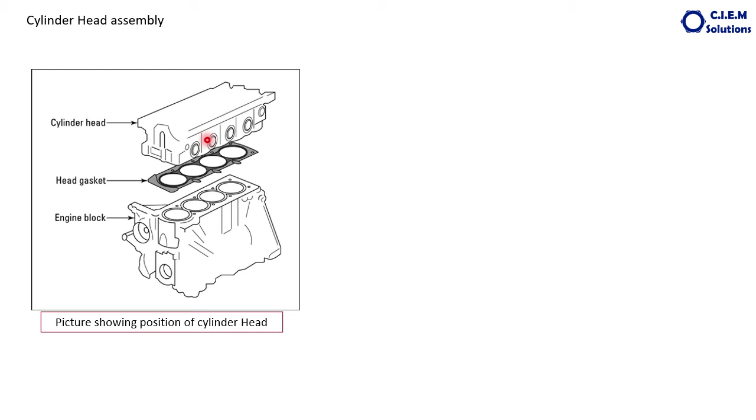A typical 4-cylinder engine cylinder head looks like this. You can see there are total 8 valves, 4 inlet valves and 4 exhaust valves, and the valves are secured. This center one is the valve, exposed here - the valve stem. This split piece is called valve locks or valve collets. This is the valve spring retainer. This is the valve spring which holds the valve always in closed position, and inside there is a valve guide, and the other side of the valve is called the valve head. We will be discussing in detail about each and every component.

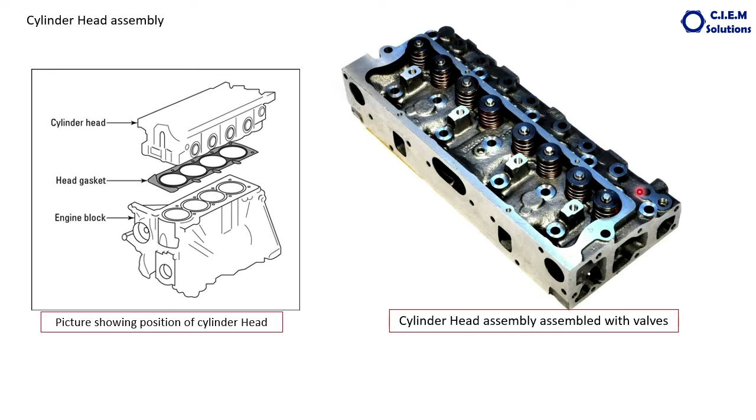These holes are provided for the push rods, which are part of the valve operating mechanism. This is the same head, you can see the other direction. These are the areas for the valve seats - in this groove valve seats are inserted, which are closed with the valve head.

This is another 4-cylinder engine cylinder head which has 4 valves per cylinder, 2 inlet valves and 2 exhaust valves. This is 1 exhaust valve and 1 inlet valve, that is 2 valves per cylinder, and this is 4 valves. All modern engines, majority of them, are coming with this design. Why 4 valves? To get more intake air inside the cylinder and to produce more power, and to evacuate the exhaust gases outside. So the main purpose is to produce more power in the confined cylinder area.

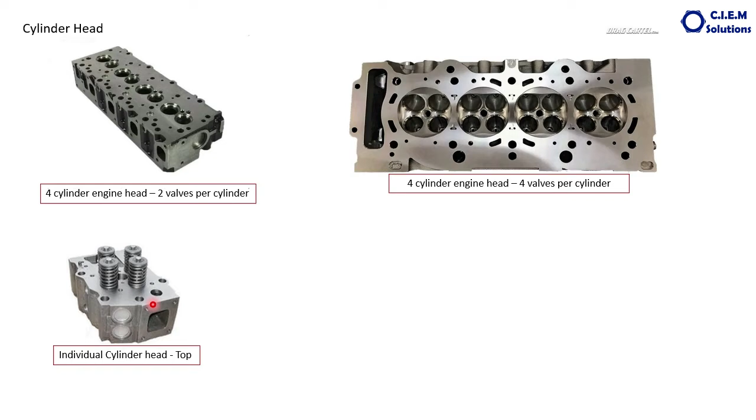This is another type of cylinder head, called an individual cylinder head. Large capacity engines have this type of cylinder heads. Why? Because in case of any problem in the cylinder head - maybe a crack, maybe damage - if the cylinder head is rejected, the entire cylinder head has to be thrown away, which is expensive for higher horsepower engines. So individual cylinder heads are made for that. Suppose one area in one cylinder has a problem, it is enough to replace only that particular cylinder head.

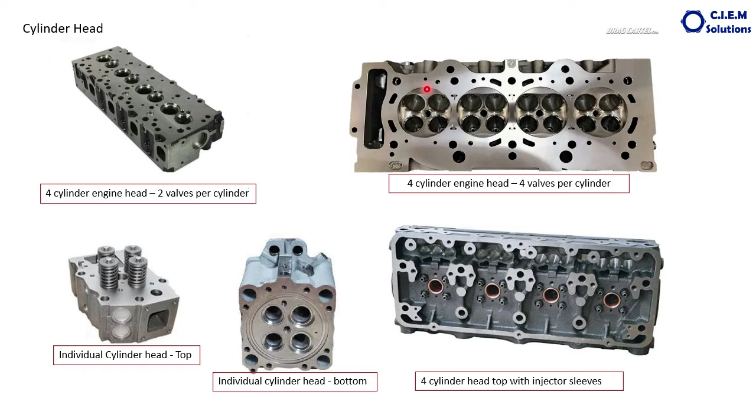The back side of this individual cylinder head looks like this. This is again the 4-cylinder head. You can see these copper portion areas - these are called injector sleeves. These are provided to fit the injectors securely inside and also to provide sealing for the fuel passages. How the sealing takes place we will discuss separately with the injectors. Some injector sleeves are also directly exposed to the coolant in order to dissipate heat at a faster rate.

And these hollow tubes which you can see here are called valve guides. These are useful to guide the valves' up and down movement. These are called valve guides, and they are also replaceable after a certain time.

Now let us see what is the job of the cylinder head. The cylinder head has to give the sealing for the combustion chamber. The top portion of the combustion chamber is sealed with this head - this is the place which seals the cylinder from the top portion. The bottom portion is sealed by the piston and piston rings. During the combustion process, all that heat and thermal and mechanical pressure also act on the cylinder head.

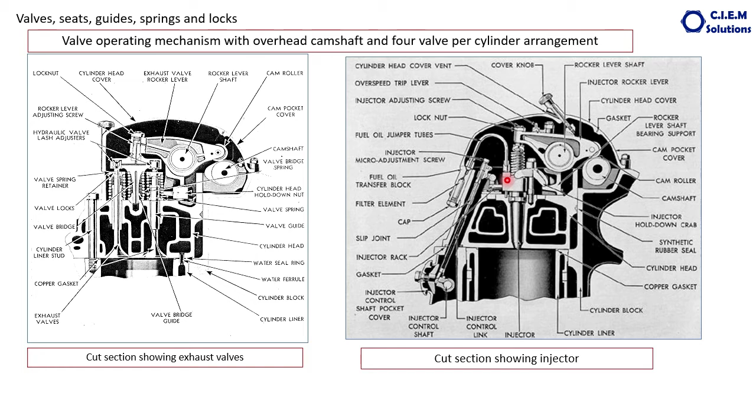And if you cut the cylinder head a little bit away, you can see the injector placement here. This is what we discussed about the injector sleeve in the previous slide. This is the injector, and this is again fuel piping, etc. Actually, this is how it looks like.

After the cylinder head, now let us discuss the valves. This is the complete valve assembly. This is the valve. This is called the spring collar, where the bottom portion of the spring sits, and it is on top of the head. This is the valve guide, which has a hollow tube - the stem of the valve will be inside this valve guide.

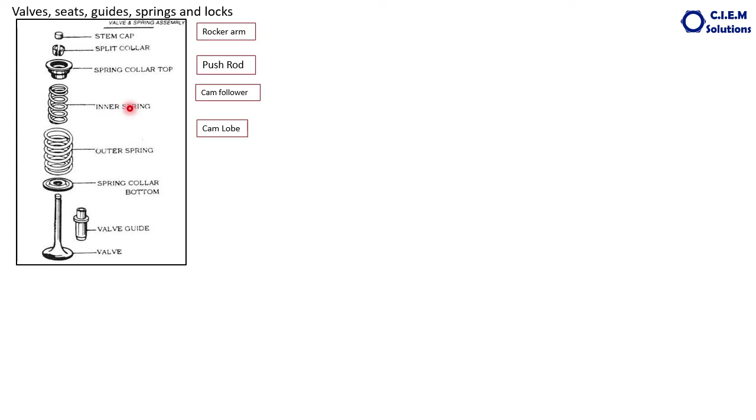This is the outer spring, this is the inner spring. Some engines are provided with 2 springs and some engines are provided with a single spring. This is called the spring retainer or spring collar. And this is called the spring split collar. This is again called the stem cap. Above this there will be the rocker arm, then below there will be the push rod, then there will be the cam follower, cam lobe, etc., what we have seen in the previous slide. These are all the various parts fitted inside the cylinder head.

This is what we have seen in the previous slide, the valve operating mechanism, or valve train. When the camshaft rotates like this, in this position, because of the lesser radius in the cam lobe, the valve is in closed position.

When the lobe comes here, this push rod is lifted. When the push rod is lifted, this rocker arm's end is lifted and this end is pushed down, pushing the valve down and creating a passage. If it is an inlet valve, fresh air enters from outside to inside. If it is an exhaust valve, burnt gases are scavenged from inside to outside. This is how the valve operates.

The spring is provided to hold the valve against the seat face, closing it always. Whenever the lobe reaches here, in relation to the piston movement inside the cylinder, this valve is opened and closed.

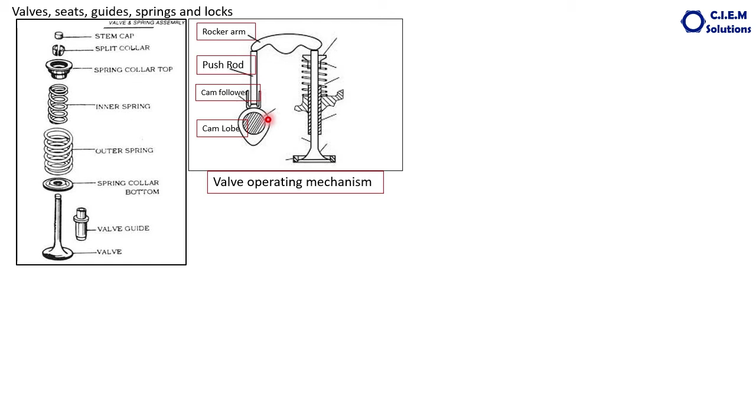For example, if it is an inlet valve, when the piston travels from TDC to BDC during the suction stroke, the lobe will be in this position and the push rod is lifted, the rocker arm is lifted here and pushed down, opening the valve. As soon as the suction stroke is over, the lobe rotates further, bringing the valve back to its seating position with the help of the spring.

Now let us look at the individual parts. This is the valve. This top portion is called the valve stem, and this bottom portion is called the valve head.

In the valve stem, there is a groove provided to secure the lock firmly in the head. The collets come and sit here, locking this valve. Then this is called the tip. The tip is the hardest material in the valve because it's always subjected to opening and closing against the rocker arm.

This joining place between the stem and the head is called the fillet. The recommended amount of fillet radius is maintained as per the manufacturer's guidelines. The bottommost, front portion of the head is called the combustion face, because this is the area exposed to the high temperatures inside the cylinder.

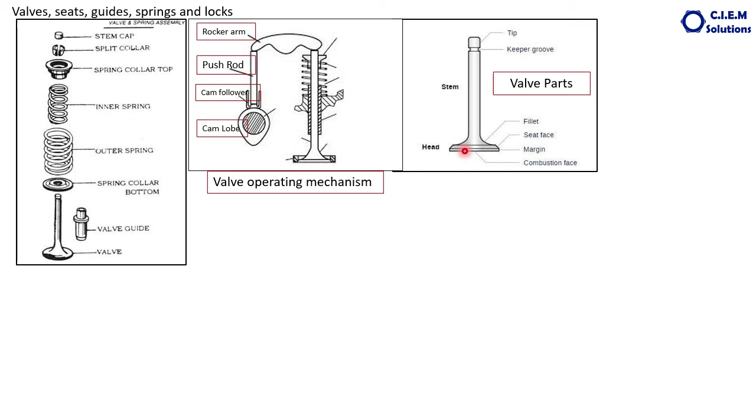When it comes to material, these valves are always moving inside the valve guide, and there is always a hammering action on the valve tip. The valve face or valve head is exposed to tremendous temperature, both inlet and exhaust valves, in the combustion chamber. They must withstand all thermal and mechanical loads, possess minimum thermal expansion properties, and be wear resistant.

Particularly in the exhaust valve, the exhaust gases pass through with a temperature of around 400 to 450 degrees Celsius. So the stem and seat of the valve should withstand that temperature. The material used in the exhaust valve is slightly different from that used in the inlet valve. The valves are made with silicon chromium steel or austenitic chromium nickel steels, and the valve heads are formed through a forging process.

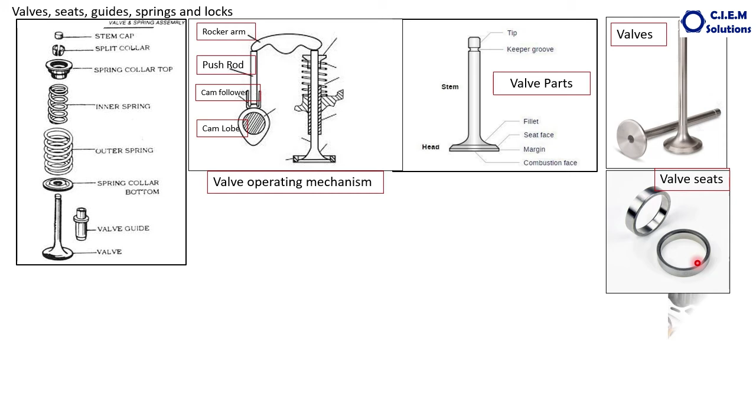This is how valve seats are inserted in these respective places. There are 2 grooves for exhaust valves and 2 grooves for the inlet valves. This is how the seats are inserted here, and this portion is the cross section of the valve seat. You can see the slight tapered position. This is how it is fitted here.

As the valve head and cylinder head face are always subjected and exposed to high temperature, the valve seats are also exposed to high temperatures because these are also in the combustion chamber. The valve seats should be able to withstand all that high temperature and other stresses, mechanical and thermal, because of the up and down movement of the valve, with hitting force occurring during valve opening and closing. They should be able to withstand all such hammering actions along with the thermal loads.

To withstand all these thermal loads, the seats are made with cast iron alloyed with some critical metals like silicon, phosphorus, molybdenum, chromium, etc.

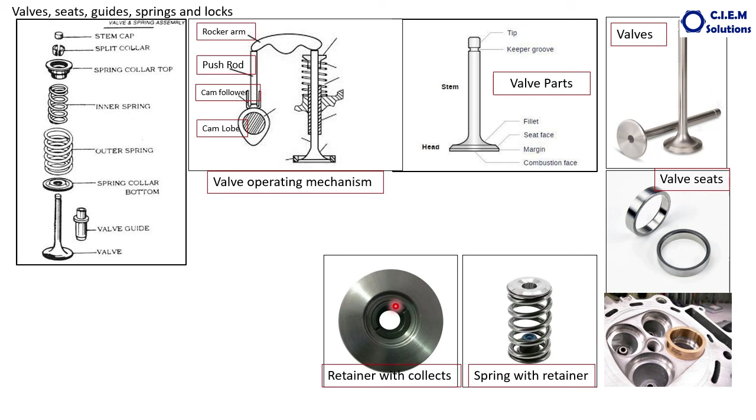This is the valve retainer. If you see the face, it looks like this. But inside this, you can see these split pieces again - two split pieces. What are the split pieces? These are the split pieces, called valve collets or valve locks.

The valve stem comes here, and these locks will be placed in these grooves. The outside diameter conical surface is secured within this retainer, whereas this exposed surface is inside this groove, so that it locks the valve in its position.

These are called the rotocoils. What is the job of the rotocoil? Some older version engines have these retainers, while the majority of the latest engines have these rotocoils. It rotates very slightly like this, when the valve is moving up and down. There is some mechanism inside, a spring and all these things.

Why are these rotocoils provided? When the valve is moving up and down with high velocity, because of the continuous hammering action between the valve and valve seat, the wear is very rapid, and there is also a possibility of foreign particles getting embedded between the valve head and valve seat, causing uneven wear. So to avoid that and give uniform wear, in addition to the up and down movement, the valve has to rotate simultaneously, giving some circular movement. To give that movement, these rotocoils are provided.

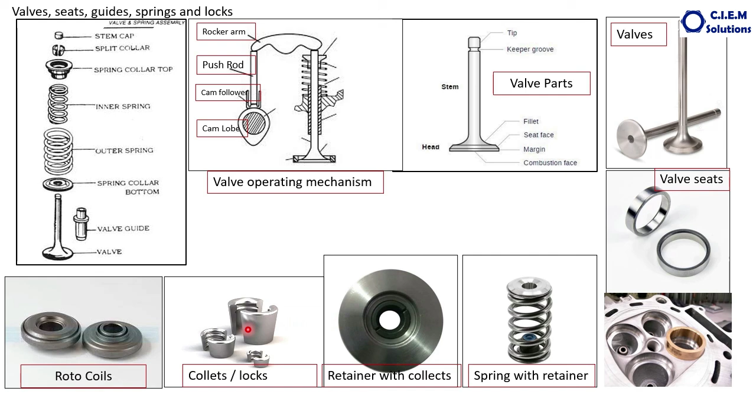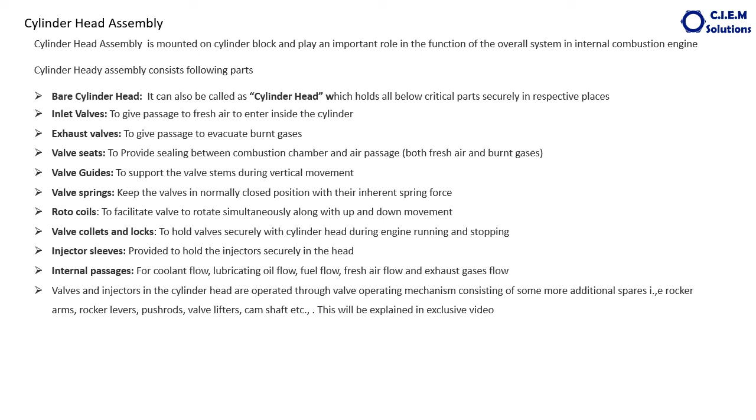This is about the cylinder head assembly, that is the bare cylinder head and other parts fitted in it. I am giving 4 pages of notes here, capturing some important points.